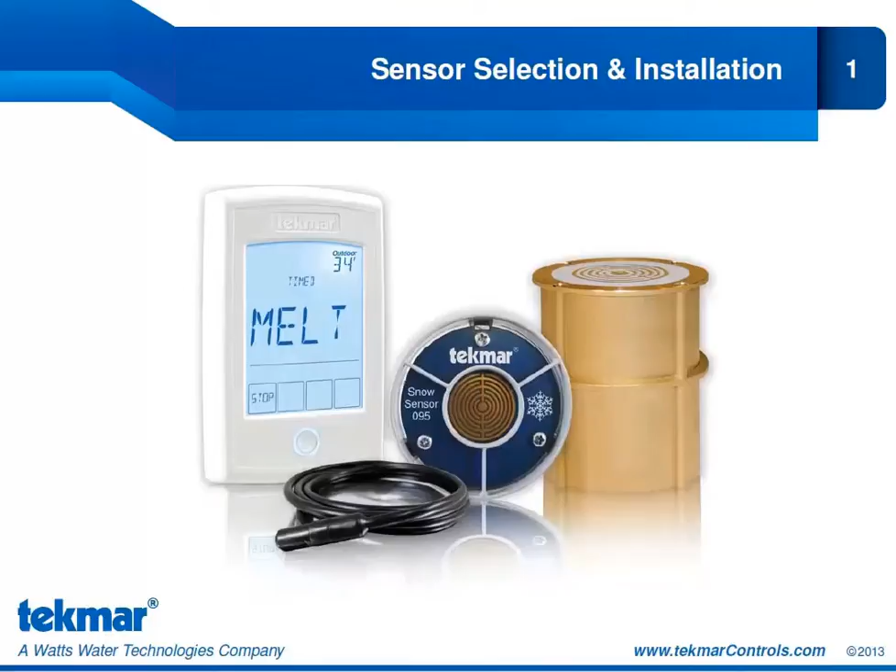Welcome to the third segment in tekmar's snowmelting webinar training series. This segment is going to focus on tekmar snowmelt sensors, and we'll look at which sensors are compatible with which of tekmar snowmelt controls, and then we'll look at those individual sensors, how we operate them, and how we install them.

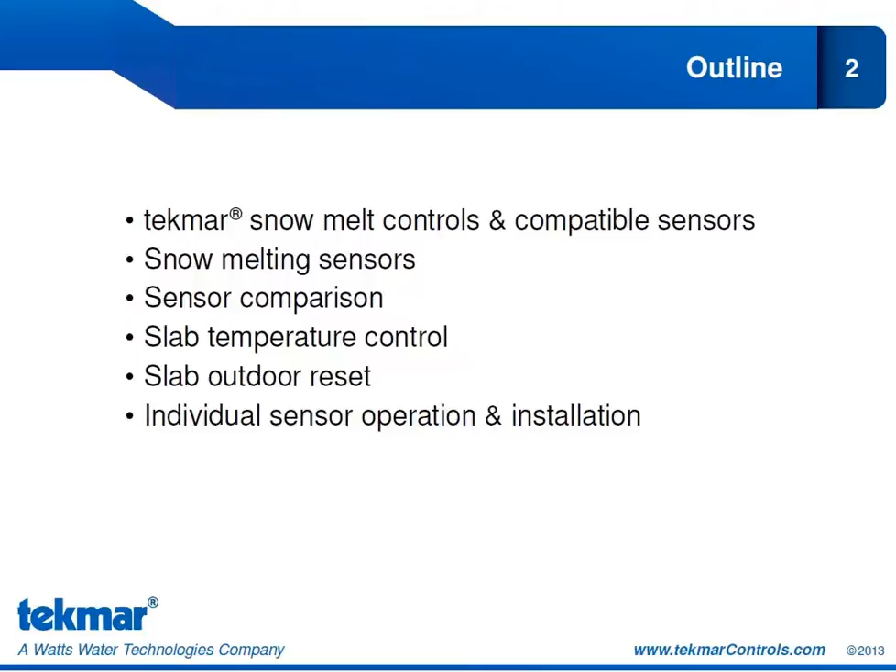The outline for the presentation is to begin by looking at all of the tekmar snowmelt sensors and looking at which sensors are compatible with which snowmelt controls. Then we'll take a closer look at the snowmelt sensors and we'll compare them. What does each sensor option allow us to do in the way of control? Then we'll look at the concept of slab temperature control and which sensors will allow for that. We'll look at slab outdoor reset, and then we'll look at how to operate and install each individual snowmelt sensor.

Now this chart shows the tekmar snowmelt controls that we have available and which sensors are compatible with those snowmelt controls. So on the top left-hand side of the chart, you can see we have the 664, 665, and 667. Now these snowmelt controls are compatible with the snow ice sensor 090-094. You could also choose to connect it to the 072 or 073 slab sensor.

So you can have the automatic start and automatic stop option with the 090-094. Or you can just have a manually operated system and install the slab sensor to provide some slab temperature control. And we'll look at that more later on in the presentation.

Our other snowmelt control, our newest snowmelt control, is the snowmelt control 654. Now this is our new touchscreen snowmelt control. And it is compatible with the same two sensors that we discussed earlier. But it is also compatible with a new sensor, the snow sensor 095. Now this is our aerial mounted sensor that we discussed in the previous training block.

This is the sensor that we would use for retrofits or if we've mistakenly poured concrete without installing the 091 socket. Now you'll notice that the 095 is only compatible with the snowmelt control 654. You cannot connect the 095 to the 664, 665, or 667. It will not work. So if you're thinking about installing this snow sensor 095, it means you also need the snowmelt control 654.

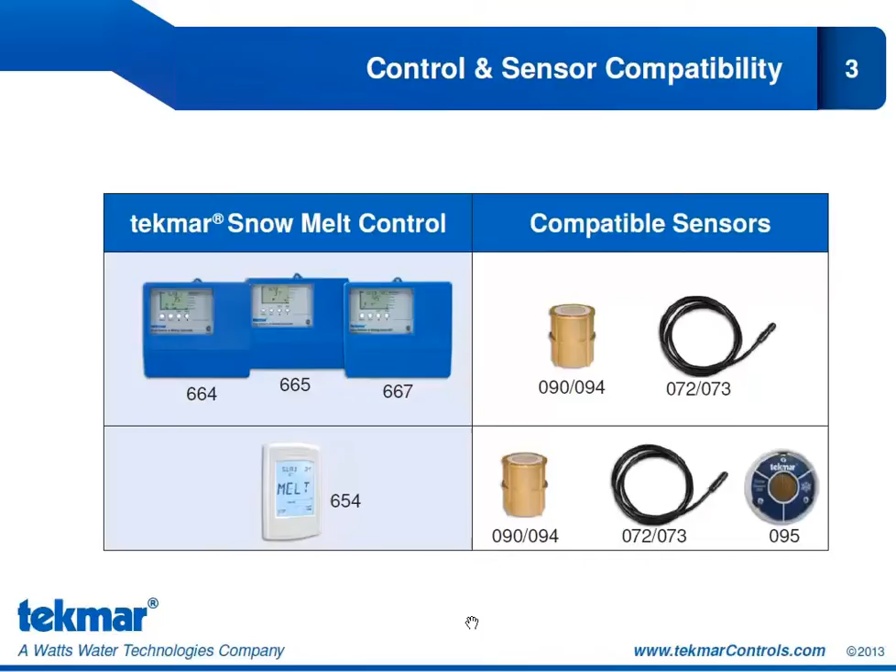Now we'll look at each of these sensor options for the 654, and we'll look at what each of those sensors can provide from a control standpoint. As mentioned, the tekmar snowmelt control 654 is compatible with three optional sensors. Your first option is to go with the 090 or 094 together with the socket 091. Now the difference between the 090 and the 094 is just cable length. With the 090 you have 20 feet, and with the 094 you have 208 feet.

So it depends on what your needs are, but going with the longer cable will prevent you from having to splice in the field. The 654 is also compatible with the 095, which is our new aerial snow sensor, and we have the 072 and 073 slab sensor as well. So each of these sensors will provide you with different control possibilities, and we'll take a look at that in the next few slides.

Now the 654 can be operated without a sensor. Of course, we never recommend that. The point of having a control like the 654 is to be able to better control your snowmelt system, and without the input from sensors in the slab, we won't be able to do that. So it's always recommended to use at least one of these sensors for an efficient snowmelting system.

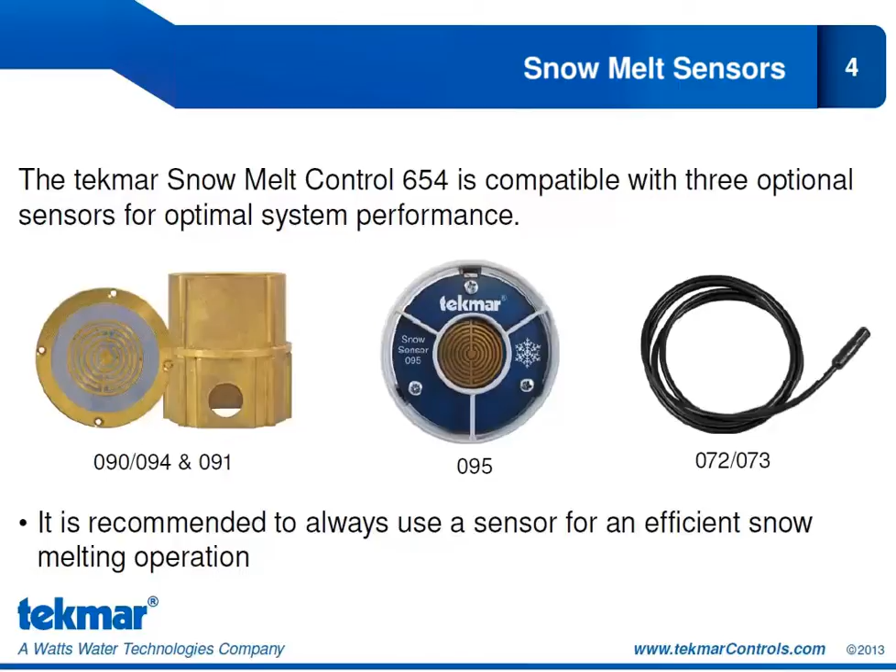Now what can these different sensors do for you? Well, the 090 or 094 will give you the automatic start and stop that we discussed in the previous training block. So this is our sensor that can automatically detect the presence of moisture to start your snowmelt system, and will detect when it is dry to automatically stop the snowmelt system. Since there's also a sensor included that measures the slab temperature, it introduces the feature for slab temperature control, and we'll talk about that in the upcoming slides.

If you go with the 095, the aerial mounted snow sensor, you have the automatic start and timed stop option that we talked about in the previous training block. So this would be a great scenario for retrofits, or if you've mistakenly poured the concrete before installing the socket, you have the option to still have at least the automatic start by installing the 095 snow sensor.

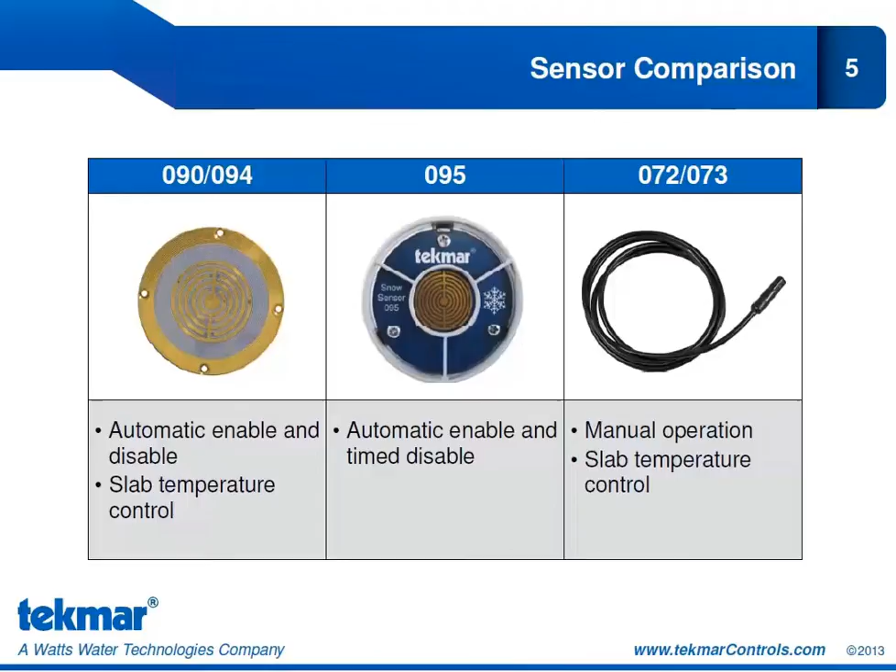What the 095 does not offer you is slab temperature control. There is no sensor in the slab to be able to accurately control the slab temperature. However, you could combine the 095 with a slab sensor 072 or 073. If you use it on its own, the slab sensor could provide manual operation, and it does offer slab temperature control as well. Combined with the 095, you get the automatic start and timed stop. In addition, you get the slab temperature control. So when installing the 095, if possible, we do recommend installing the slab sensor as well.

Now, what is slab temperature control? In order to provide that, we of course need to measure the temperature of the slab. So we do show here a sensor peeking out there, and that is measuring the core temperature. Now we can vary the core temperature of the slab in order to keep a relatively constant slab surface temperature.

Now, because the slab surface temperature is of course going to change as outdoor temperature changes, it means varying the temperature of the slab core in accordance to the outdoor temperature, with the goal always being to maintain that relatively constant slab surface temperature. And as we talked about in the previous blocks, that does allow for an efficient snowmelt system. We are delivering the right amount of heat to the slab. We're not having a slab that runs wild.

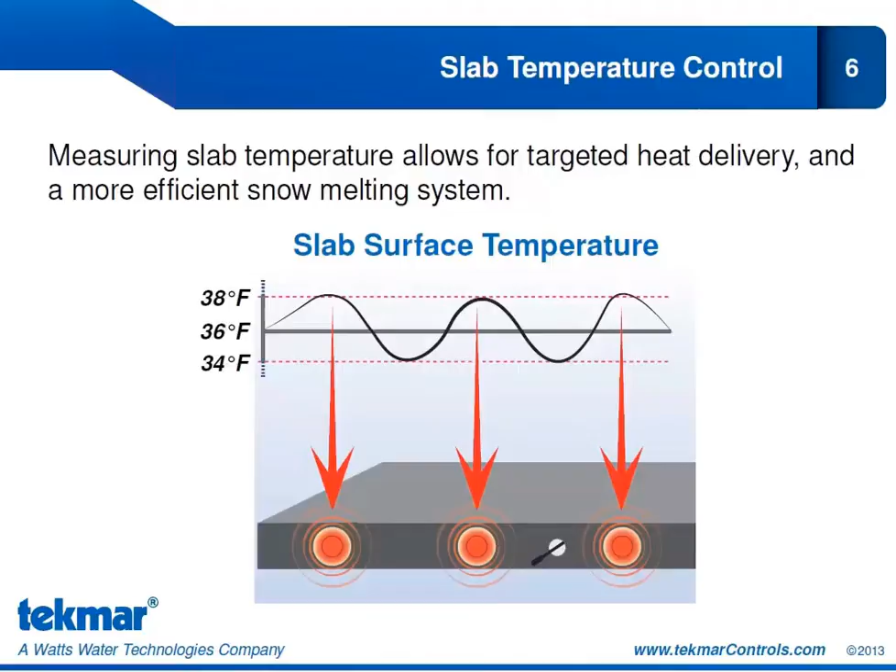So what our snow melting controls do is we measure the outdoor temperature and we automatically adjust the slab core temperature, the goal always being to maintain a constant slab surface temperature. And this slab surface temperature will be in accordance to what you set up when you program the snow melting control.

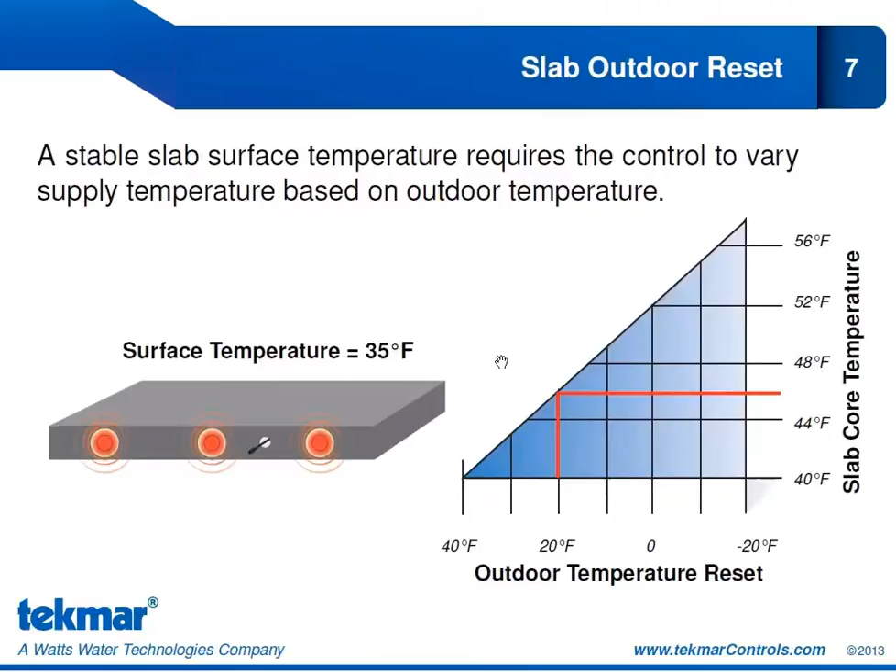So we want to keep our slab surface at the lowest possible temperature that it needs to be in order to melt the snow. And we do that so that we have a more efficient system. We are controlling the heat to the slab and we are minimizing our heat losses.

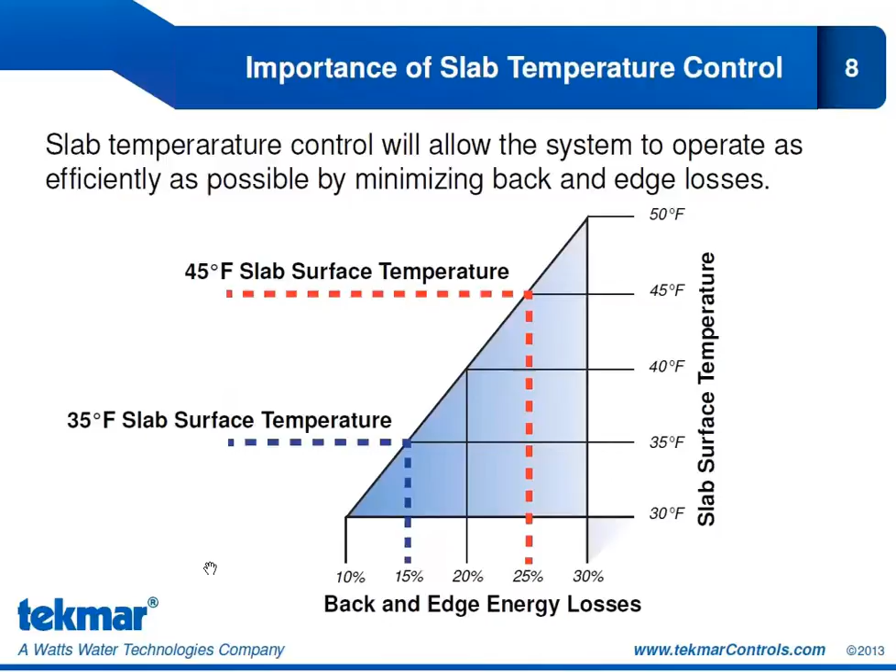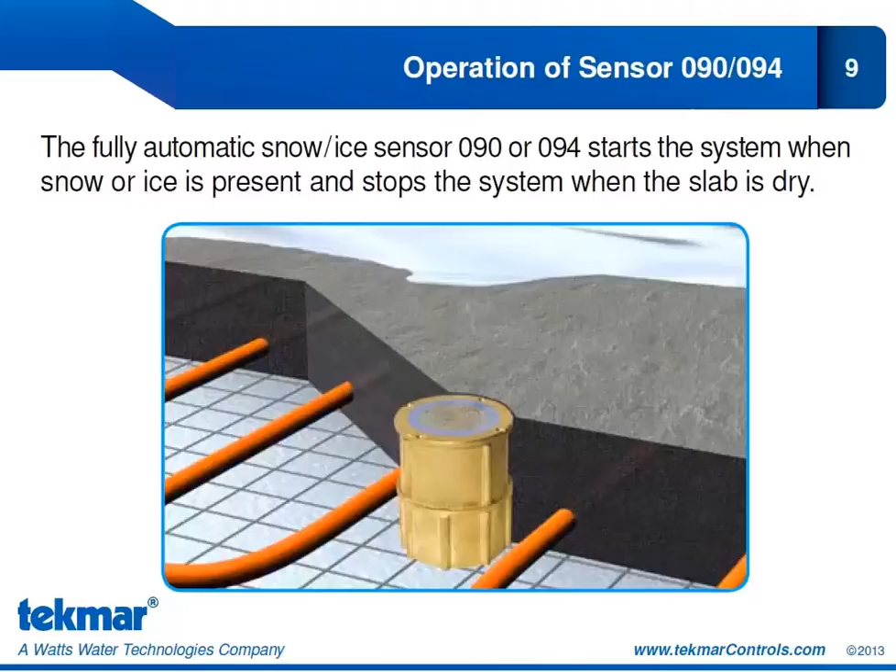So we're going to take a look at the 090 and 094. So this is a fully automatic snow ice sensor. It starts the snow melt cycle whenever moisture is detected, so whenever snow or ice is present. And it stops the system when the slab is dry. The way it does that is it looks to see if the sensor is dry. Once the sensor itself is dry, then the control will go through an additional melt time that is programmed by the user. It's called the additional melt time, and we'll look at that later in the training slides.

Proper installation of the 090 or 094 sensor is critical. So it's important that the sensor is not installed in areas that will be covered by vehicles. We don't want it near any building overhangs, bushes, trees, or protection. We want it installed in the last place to be warmed by the sun and the last place for drainage to dry it off. And of course the first place to be affected by a snowfall.

So we do want to keep it on as long as there is snow on the slab. So it should have an accurate representation of the conditions of the slab. Now what we've shown here are two different installation types. On the left hand side you can see the sensor is on a level surface. And you can see the top of the sensor is flush to the snowmelt surface.

Now some driveways are sloped. I know this is probably an accurate representation of my own driveway. And in this case, we are going to install the sensor so it is still flush with the surface. It too is on a slope. And we want it to be near the lowest elevation of the slope.

The reason we want it to be at the lowest elevation is because we don't want the sensor to be dry while perhaps the bottom of the slope is still wet. Because then the sensor would say, okay, I'm dry. Go through our add melt time. We run the risk of there still being some melt water at the bottom of the slope, and that melt water could refreeze. So that's why it's important, if you do have a sloped driveway, to install that sensor near the lowest elevation of the slope.

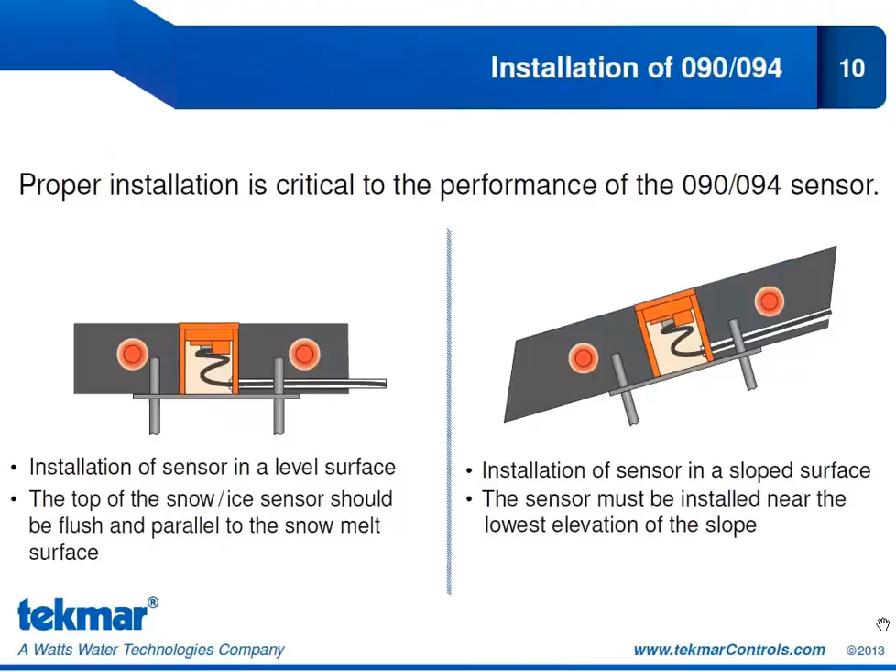Now to install the 090 or 094, we of course need the 091 socket, shown here, and the mounting plate, which is shown here. Now we're going to use the mounting plate and fasten that to the snowmelt surface, and then we can attach the socket to the plate itself. So let's take a look at the layout of this plate. You can see there are a number of holes in the plate. Number 1 in the center of the plate is the drainage hole.

Now drainage is extremely important because we want to make sure that we don't have a situation where the socket fills with water and then the sensor is essentially sitting in a pool of water. What that could lead to is the corrosion of the internal wiring of the sensor. So to avoid that, drainage is absolutely essential. There is that hole in the center of the plate for drainage. The plate should be installed on top of gravel to allow for that drainage to occur. If we are installing it on another surface, make sure that there is a hole in that surface as well to allow for the drainage to occur.

Now number 2, a series of 4 holes, are the socket screw holes to attach the socket to the plate. You can see also 4 holes the same size on the outside corners of the plate, and that is for the rebar holes. So we'll put rebar through those holes into the surface, and that is of course to fix the plate and the corresponding socket to the snowmelt surface. Number 4, the rebar tie holes. And you can see we've illustrated how to fasten the plate to the rebar. Lastly, we have 2 holes labeled number 5, and those are the conduit tie holes. So you can fasten the conduit to run the cable back to the snowmelt control.

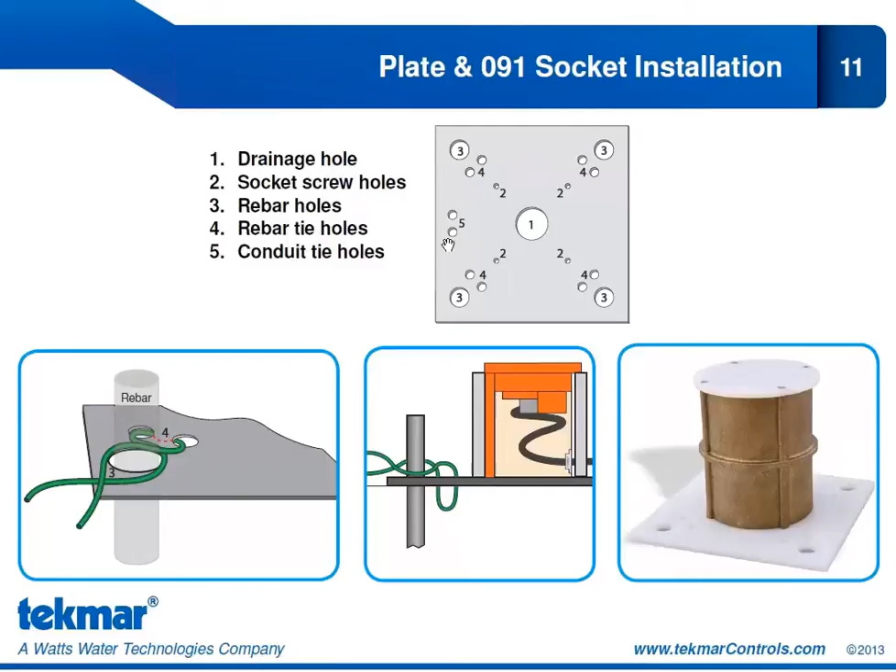Now when we install the 090, the 094, we of course have to make sure that the socket and the plate are mounted to the snowmelt surface before the concrete is poured. You wouldn't believe how often it happens that that is forgotten, and then of course it's very difficult to install the 090 or 094 snow and ice sensor. You'd have to actually core the concrete to do so. So make sure that is in place before the concrete has been poured.

We also have included a plastic plug, you can see here. So the plastic plug would go on top of the socket, then the concrete would be poured. Once that concrete has cured, we can remove the plastic plug and insert the sensor and run the cable through the conduit.

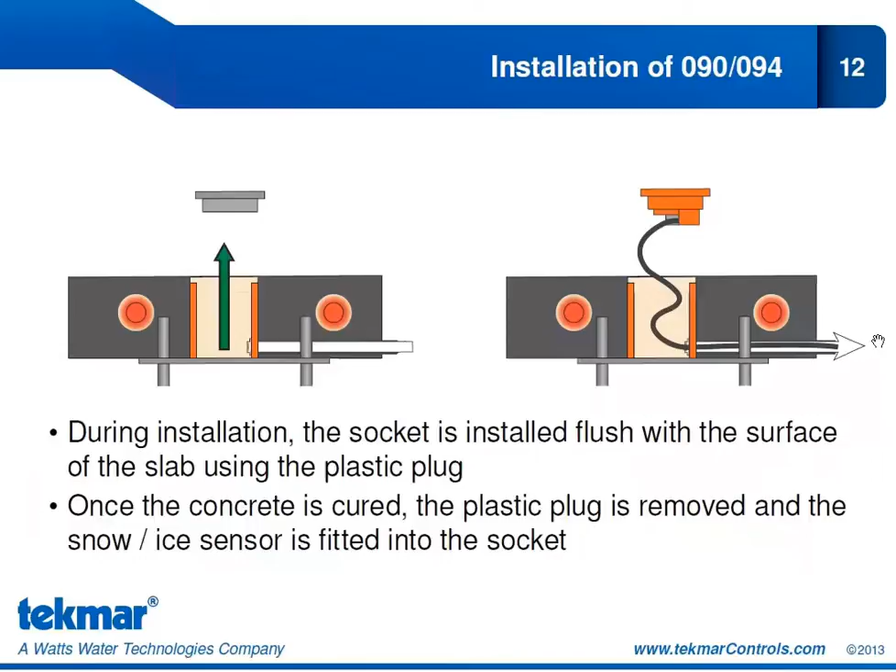If you don't have the 090-094, you can still have slab temperature control. And you can do so by having just a slab sensor input into the slab. Of course, this way you don't get the automatic start and stop, but you will have slab temperature control. So here we have an illustration where we have our slab sensor in the conduit. You can see it's halfway between the pipes. We'll look at that closer on the following slide.

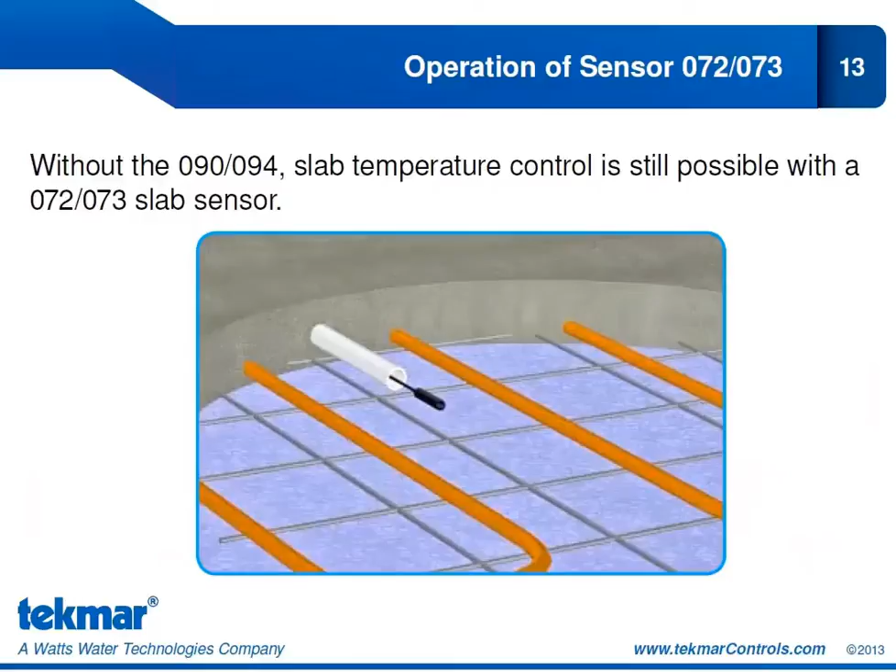So here's our conduit, here's our sensor. It is halfway between the pipes, or if you're doing electric snowmelt, halfway between the cables. And we have it shown to be approximately 1 inch below the snowmelt surface.

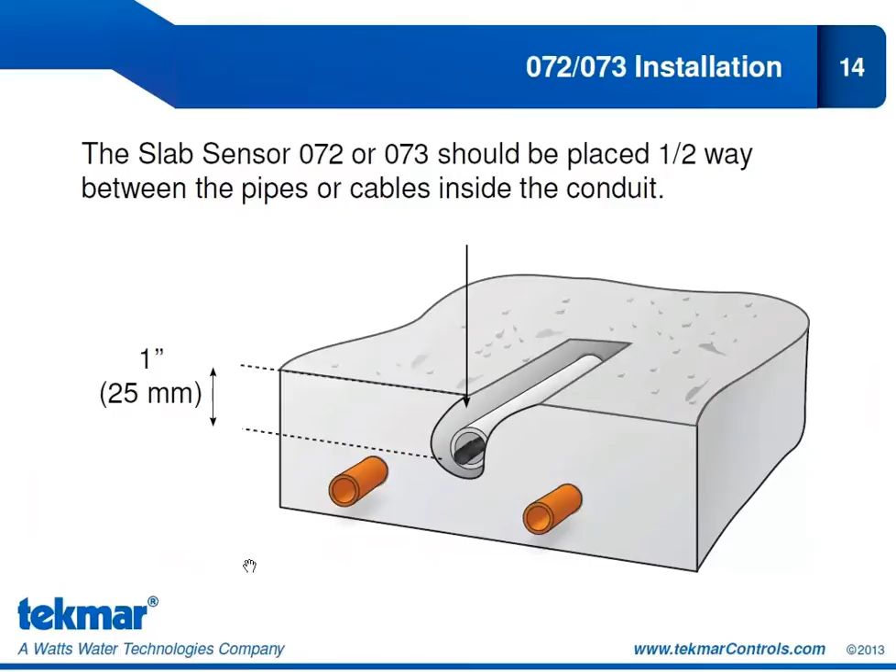Then we have our newest sensor, the Snow Sensor 095. And that is an aerial mounted sensor that can detect falling snow. So this gives you the automatic start and timed stop operation that we've discussed. So the stop is provided by the 654. It has an internal timer, and once that time has expired, the snowmelt system will return to its off state.

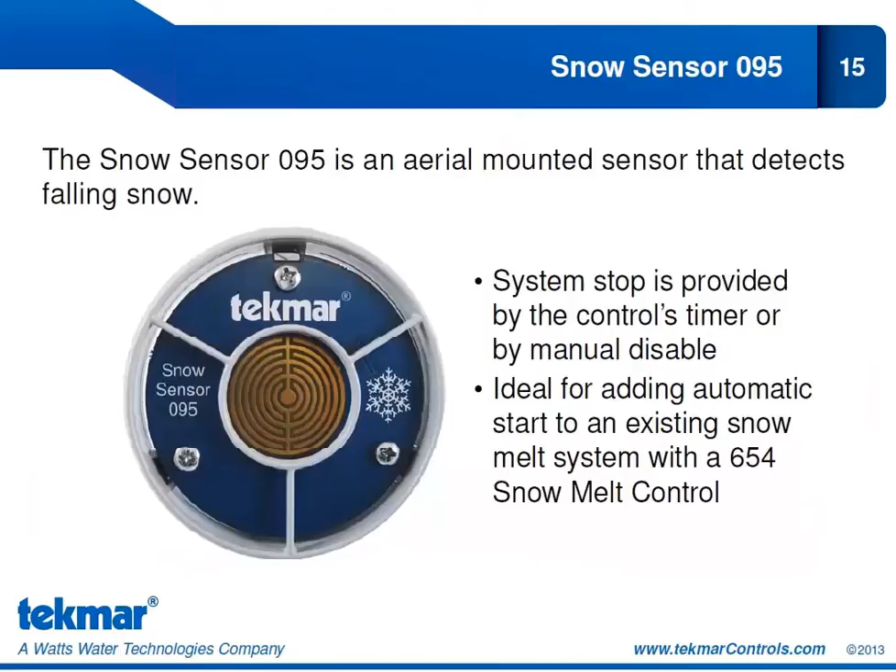This is a great way, as I've mentioned, to add some automatic operation to an existing snowmelt system, but you do need to use the 654 snowmelt control. So you cannot connect the 095 to tekmar's other snowmelt controls. It must be connected to the 654 and only the 654.

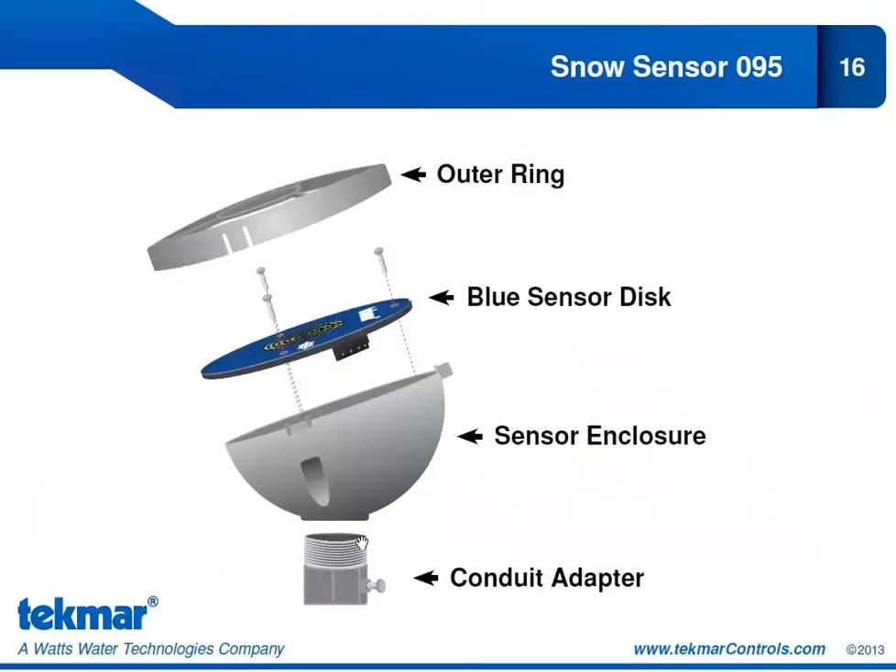Let's take an exploded view at the Snow Sensor 095. We have the outer ring at the top. Underneath that we have the blue sensor disc. Then we have the sensor enclosure, and you can see that it's slightly tilted. Now that is just to allow for drainage to occur. We don't want water pooling near the blue sensor disc. And then we have the conduit adapter that the sensor enclosure will attach to.

There are 4 wires that will run from this sensor to the snowmelt control 654: the yellow, blue, red, and black. So those of you who are familiar with the 090, the 094, will of course notice that we have 4 wires instead of 5 that you were used to with the 090, 094. And that is because we are losing the slab sensor wire, that brown slab sensor wire, because we are not actually in the slab. This sensor is an aerial sensor, so we can't monitor the slab temperature.

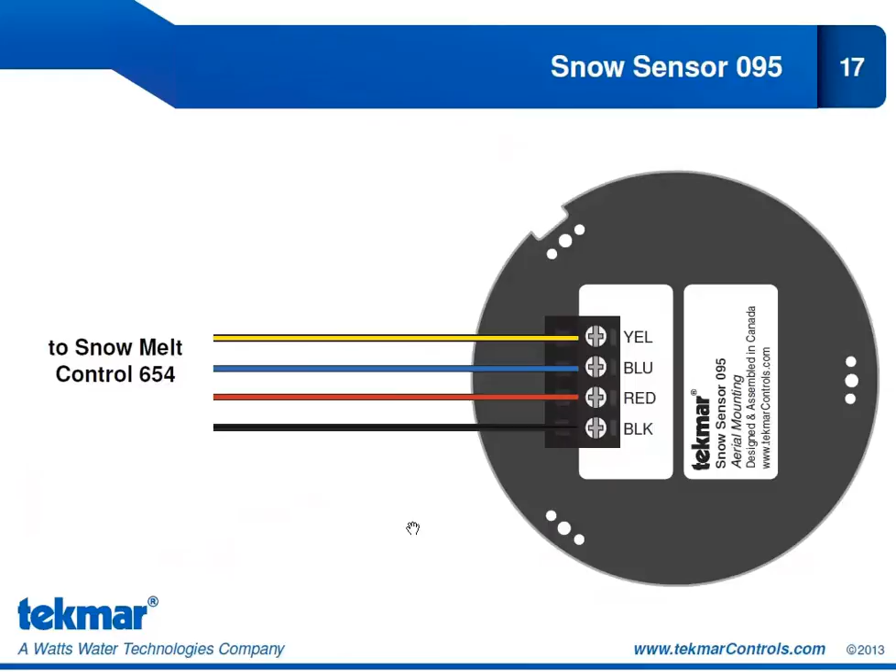Now how would you install the 095? Well, on the left hand side we have it installed just outside on the side of the snowmelt surface. So this would be an example of a retrofit location, or again one of those mistaken, I've poured the concrete before installing the socket scenarios. You could still have the automatic start by installing the 095 to the side of the snowmelt surface.

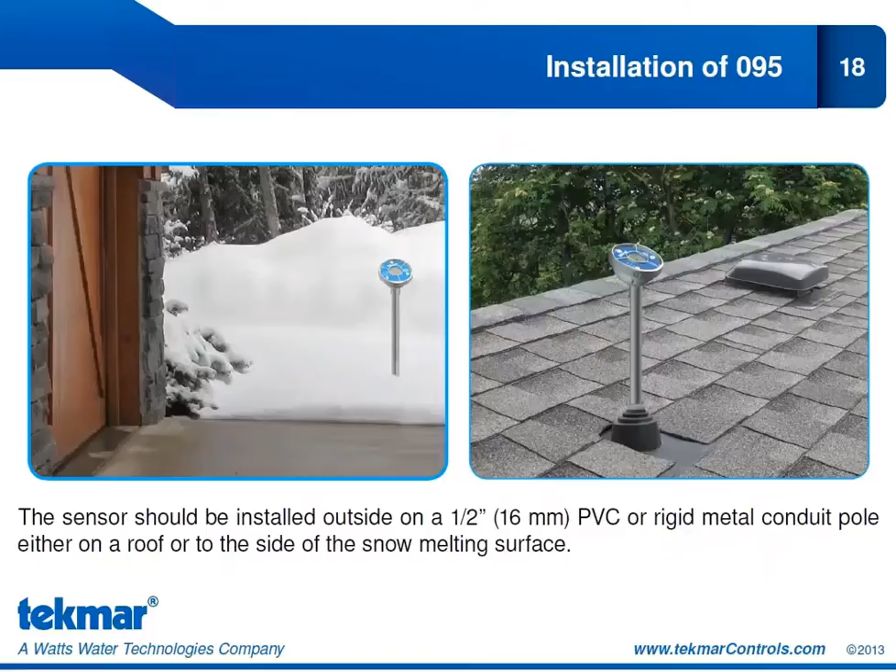We also have it shown here installed on a roof. So we can have it on the top of the roof, as I've shown here with this boot. You can also have it attached to the side of the roof. And these are shown in the installation and operation brochure for the 095.

Let's take an overall look at the sensor comparison again. We have our 3 sensors on the side: the 090 or 094, 095, and the slab sensor 072 or 073. So which sensors are going to give you the automatic start? Of course it's going to be the 090 or 094 and the 095. However, the only sensor that can give you that automatic stop operation is the 090 or 094. Time stop can be accomplished with the 095 and with the slab sensor 072 or 073. You can do a manual start and stop with any of these sensors.

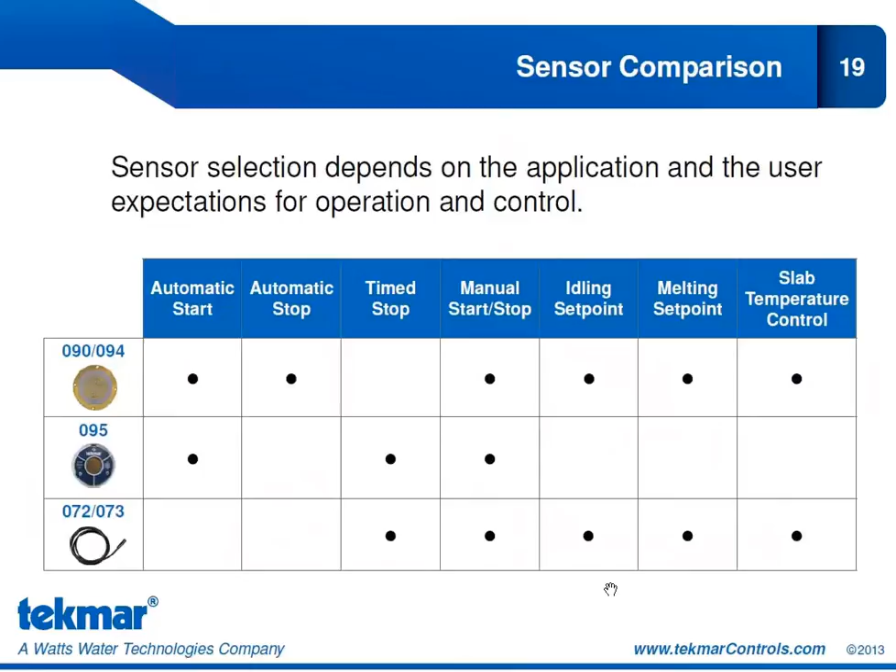For idling, we of course need to be measuring that slab temperature. That's only done with the 090 or 072, 073. Same with melting, we have to measure the slab temperature, so we need our 090, 094 or our slab sensor. And slab temperature control is achieved through both of those sensors as well. So if you combine the 095 with the slab sensors 072 and 073, you're merging this automatic start with all these other control features. So a great solution if you cannot install the 090 or 094 is to do the snow sensor 095 with the slab sensor.

In summary, we looked at the tekmar snow melting controls and which sensors are compatible with which controls. We also took a look at the snow melting sensors that are compatible with our new snow melting control 654, and we compared those sensors. What does each of those sensor options allow us to do from a control perspective? We looked at slab temperature control and slab outdoor reset and why those are important. And remember, the 095 on its own cannot give you that. So if you're going to use the aerial snow sensor 095, we always recommend to also install a slab sensor to give you that slab temperature control and to allow for slab outdoor reset.

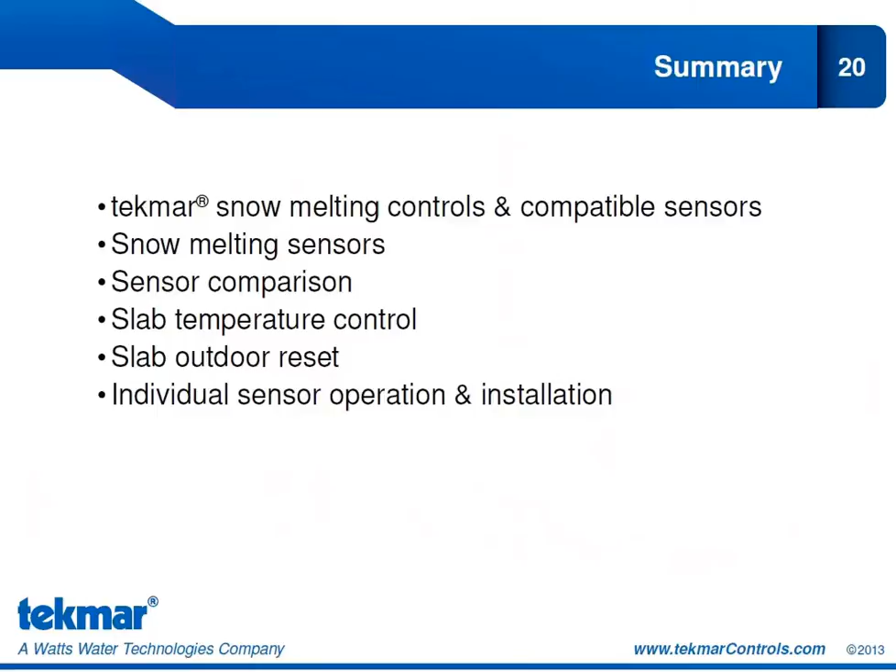Lastly, we looked at those three individual sensor options and how they operate and how we install them. And you can stay tuned for our next segment, which would be our snowmelt training segment 4. This segment will go over the mechanical diagrams for the 7 featured applications of the snowmelt control 654 so that you get a good sense of what this control was designed to operate.